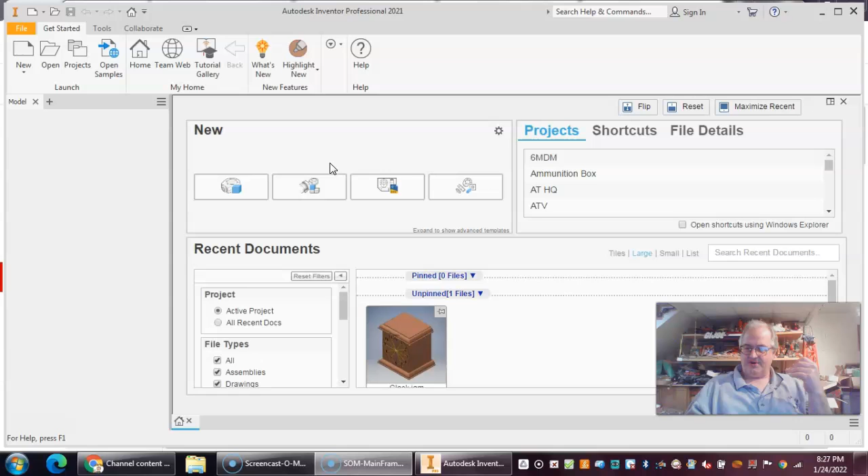The last piece measures 3/4 of an inch thick by 2 3/4 inches wide by 3 3/4 inches long. Now I'm going to do something a little different here. In the past, I've given you the starting shape as the width and length, then extruded the thickness. That's perfectly acceptable and it's generally how I start, with the two bigger sizes in my initial sketch, then extruding the smallest. Depending on your design, that may or may not be the way you want to do it, so I'm going to walk through a couple of these with you. Just watch for a few minutes before you go and do it on your own. I'm going to create a new part.

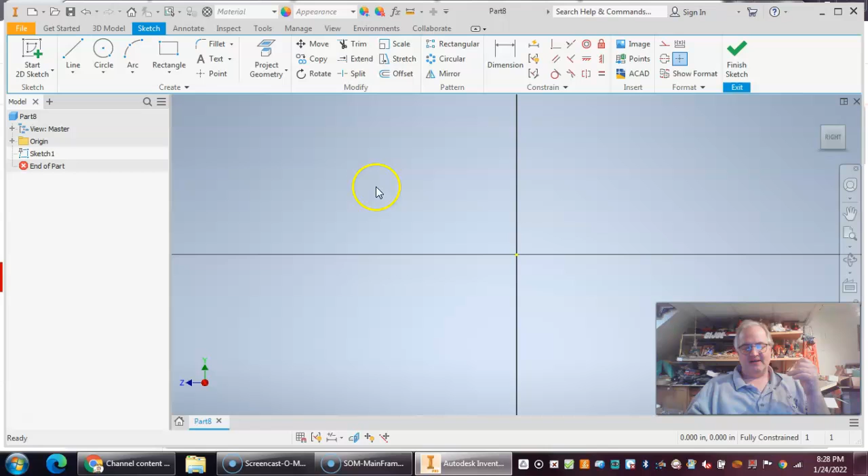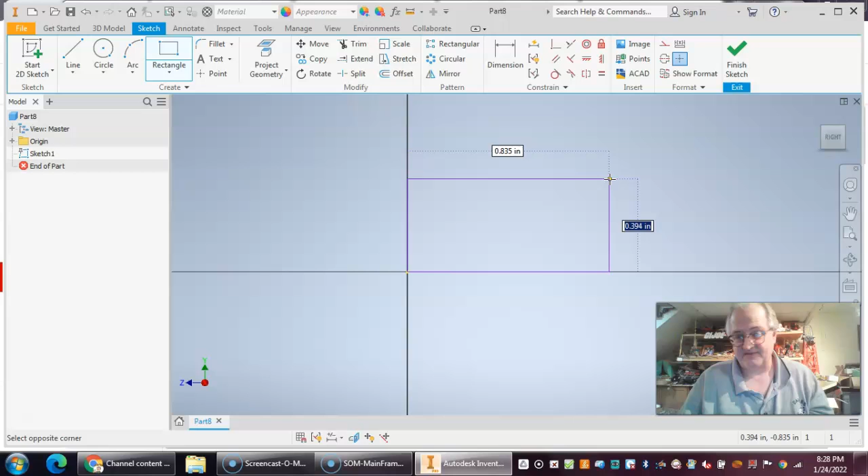At this point it doesn't really matter which plane we draw on, so for something different I'm going to select the YZ plane instead. Doing it by the width and length, I'll create my rectangle. The width was 2 3/4, and if I don't know that 3/4 is 0.75, I can enter it as a formula with the whole number plus fraction. So I'll tab over, enter 2 plus 3 divided by 4 - that's the same as 2 3/4. Hit tab, and this will be 3 plus 3/4, and enter.

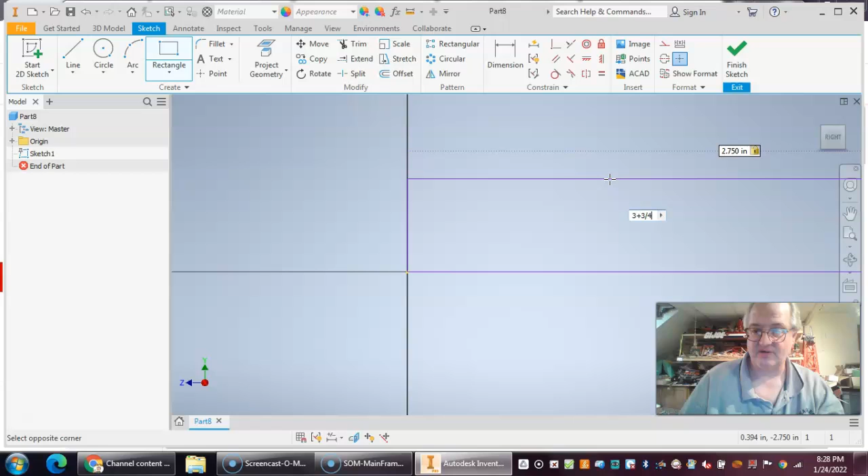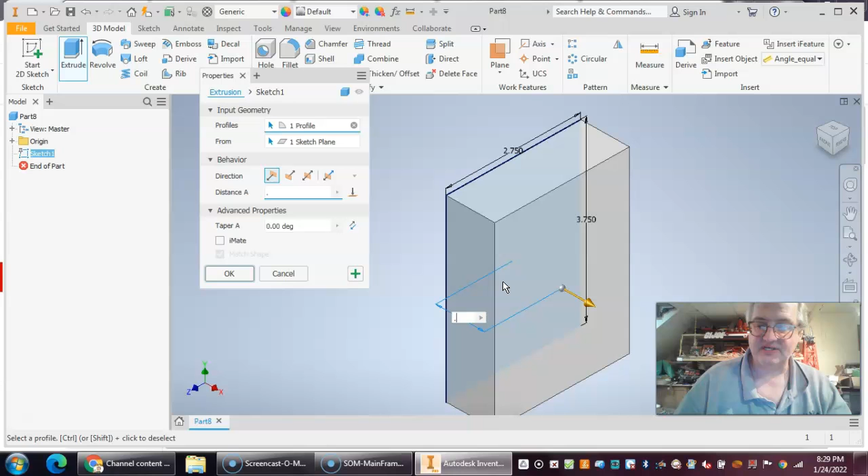Let's go ahead and hit the right view of my plane, so you'll see I've got that dimension. We can finish the sketch here, hit home, and now I can extrude that by 0.75. So there we go, I'm ready - we just apply the material.

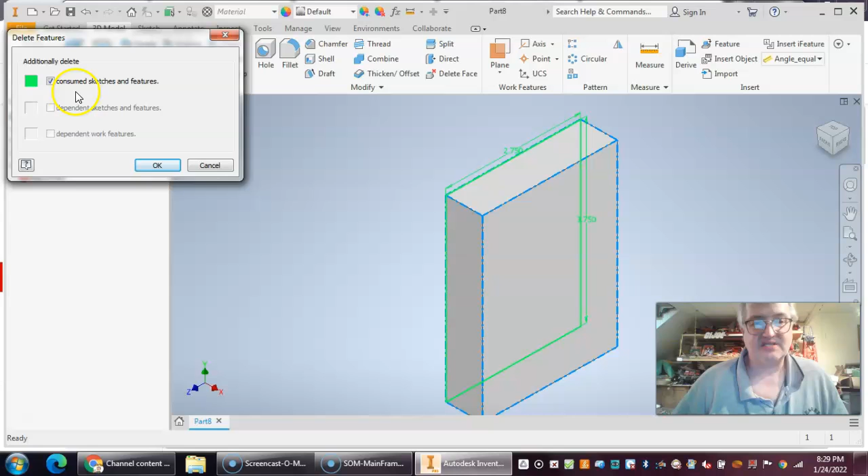That's the one method, but I'm going to delete this. I'll go to extrusion 1, right click on it, and delete that out of there. Notice it says additionally delete the consumed sketches and features - in this case I want to do that too, because we're going to get rid of that sketch and start all over.

Now, instead of extruding the width and length, or instead of sketching the width and length, I'm going to sketch the thickness and the width. Let me show you what I mean. We'll go ahead with start sketch, again on the YZ plane, and I'll sketch the rectangle, picking up on the origin point.

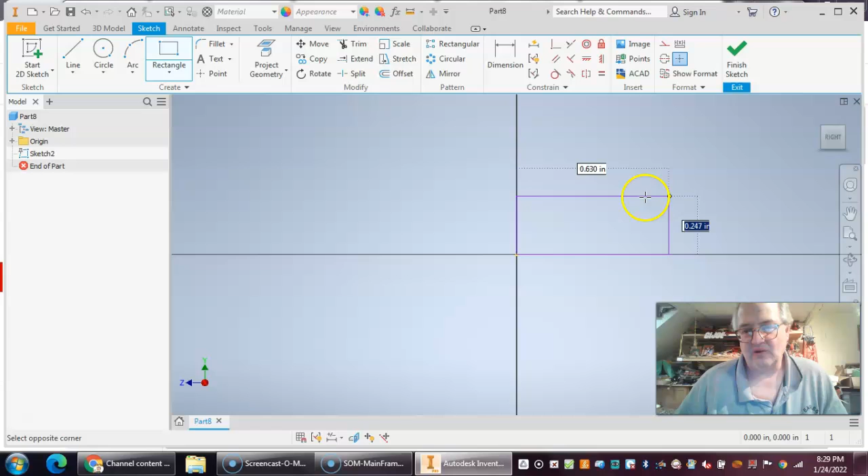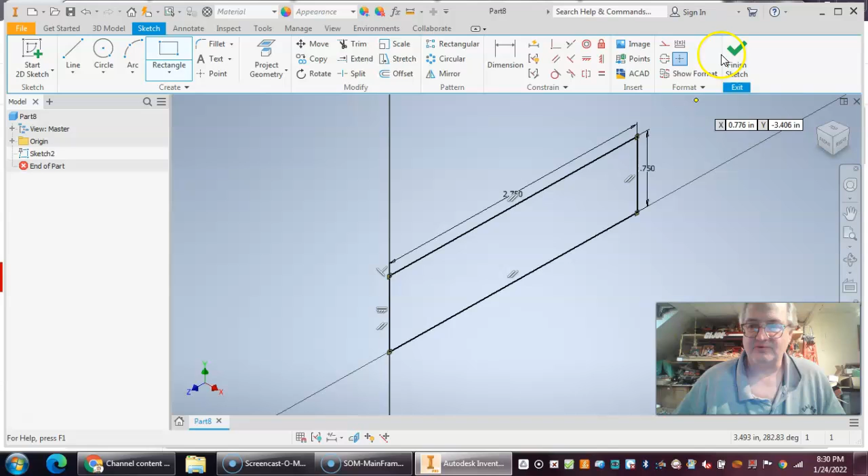In this case I do want this to be 3/4, so I'll enter 0.75 and hit tab. Now I want this to be 2 plus 3/4, and enter, so I've got that in there. Let's bring this in - you can see I've got 3/4 here and 2 3/4 on this one. So we'll finish that sketch out. Now, rather than extruding 3/4, I'm going to extrude this by 3 3/4, or 3.75. I'll change that, have it go the opposite direction, and hit OK.

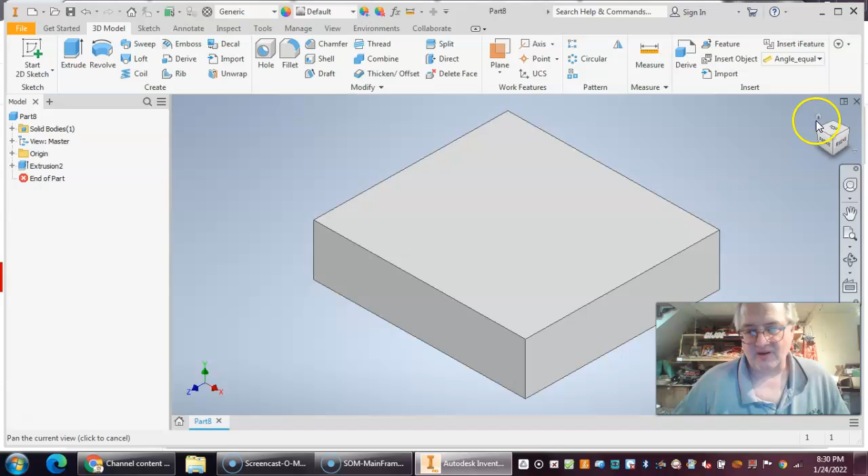I'll come over to my view cube and hit the home button, so we got that. Last thing, we want to make sure we assign this as oak, so we'll come over here, scroll down, and make this wood oak as far as our feature goes.

Now we're done. This is going to be the stop that we attach to the top, to help it seat itself on your project once it's glued up.

We'll go ahead and save as TOP, top hyphen first initial last name. Let me go back - I put an underscore instead of a hyphen. There you go, top hyphen your first initial, your last name. Make sure you navigate and store it on the desktop, and hit save. Looks like I've already got one, probably from earlier, so that's okay - we'll go ahead and say yes, overwrite that one and bring this one in there. So there we go.

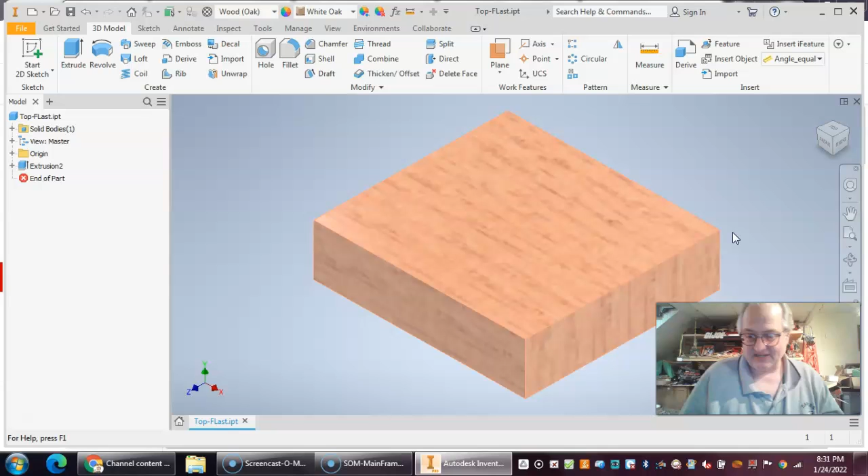We're done with that one. We've now gotten all of the parts we need to go ahead and create our drawing, or create our assembly. That'll be the next step we use and go through - creating an assembly drawing. It gets a little more complicated, but I'm sure you guys will catch on to it pretty quick once we get started.